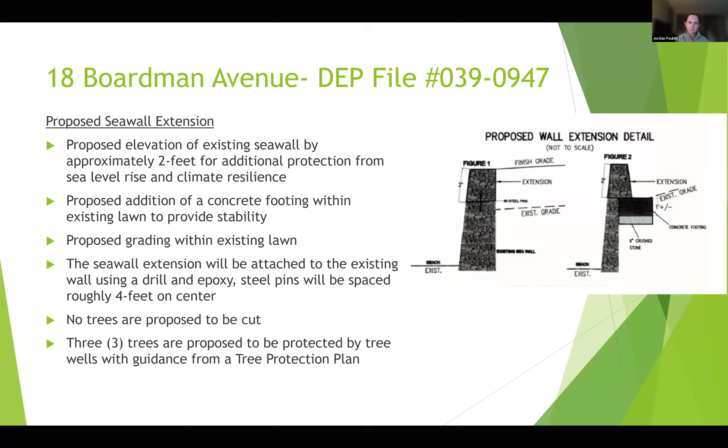The tree protection plan was drafted by certified arborist Chris Wood, who evaluated 3 trees—2 red oaks and a Norway maple. The plan includes adequately sized tree wells, maintaining appropriate root protection during construction, and limiting soil disturbance near the tree bases to help protect the trees.

The project will follow the tree protection plan during construction, and the proposed construction period is from April 1st to December 31st, with approximately a 6-week no-work period around August.

The proposed results of this project are 65 linear feet of impact to Coastal Bank, which is the majority of the existing seawall.

There's 1,225 square feet of disturbance within the 30-foot no-disturb zone, which is the grading adjacent to the seawall. Additionally, there's 300 square feet of disturbance within the 50-foot no-build zone, again from proposed grading, for a total of 1,525 square feet within the 100-foot buffer zone.

Within the land subject to coastal storm flowage, there's approximately 4,120 square feet of impact, because the entirety of this project is within the land subject to coastal storm flowage.

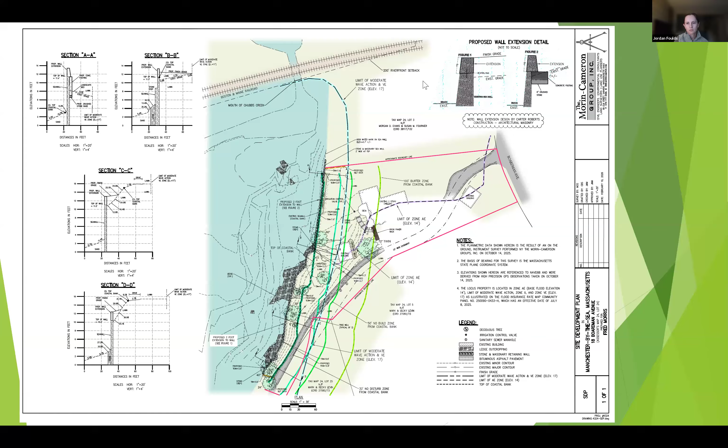How much fill is proposed, Jordan? Let me just check, one second.

So I know they're proposing to keep the grade adjacent to the wall the same. Because the wall is being raised 2 feet, they're proposing the grade adjacent, where the area is steep, be raised to the same level as the top of the wall.

All right, I think we just need to request that number. We do need to take a look at this.

I agree. Just to jump in here, there are two parts of this seawall. One half of it, the grade will be raised behind it, but it's already mounded, so fill-wise we're probably talking about 30 yards of crushed stone backfilling. The second half is a double-sided wall, so there won't be any grading on it — it'll just be raising the existing double-sided structure up 2 feet.

Okay, and is there any need to provide some compensating storage for storm flow? Because it's coastal, we don't have to compensate for storage.

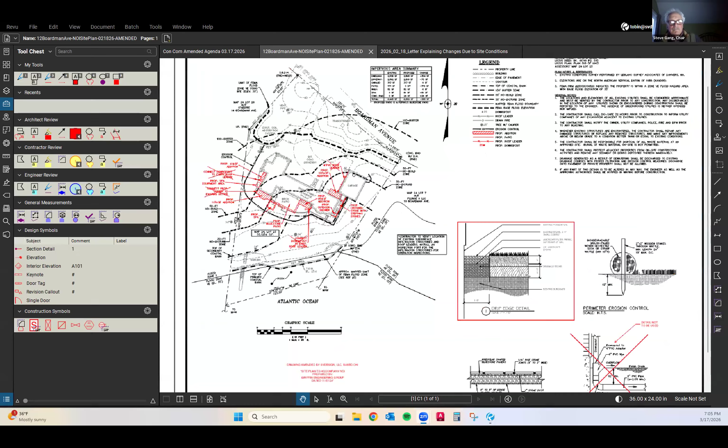Can everyone see my plan now? So it's a little bit funky because there's a secondary coastal bank. The primary coastal bank is the seawall, but there's a secondary coastal bank due to the topography, which was determined by Bob Griffin, which comes up relatively close to the house and runs along here. The areas where it would drip would be off the back of the garage, off the side of the house along this edge, and a little bit along the side edge here into what is already crushed stone there.

I was just wanting to confirm that there's a significant amount of lawn there for the dripping water to percolate. Yes, exactly - this is all lawn area between the patio and the seawall. Good, and I'm content with it as well.

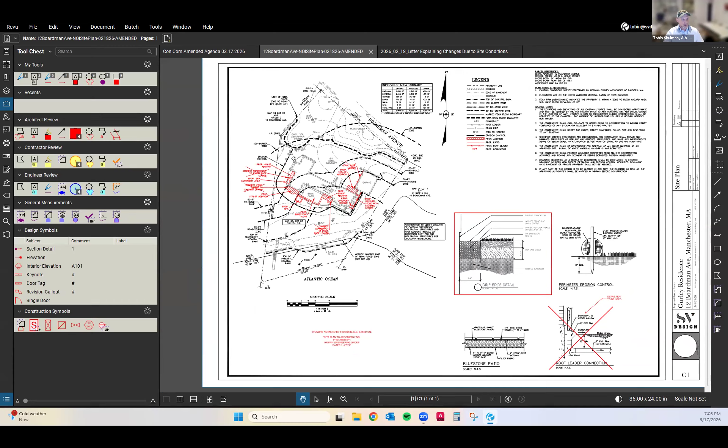Henry, Jim, David, any questions or concerns? Just a quick question, Tobin - do you anticipate addition of any more crushed stone to help with drainage? Yes, along the drip lines of the eaves, the proposal is to install about 18 inches of width of crushed stone, 6 inches of depth, to keep it from splashing back dirt on the house and give some area to absorb into, and then soak into the soil.

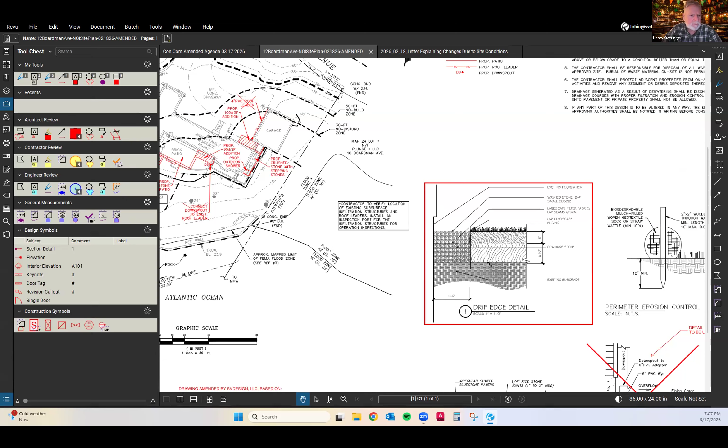Great, thank you. Could I just ask what kind of roof it is? It is an asphalt roof. Because we have expressed concern in the past just with matter leaching in off of an asphalt roof. I see.

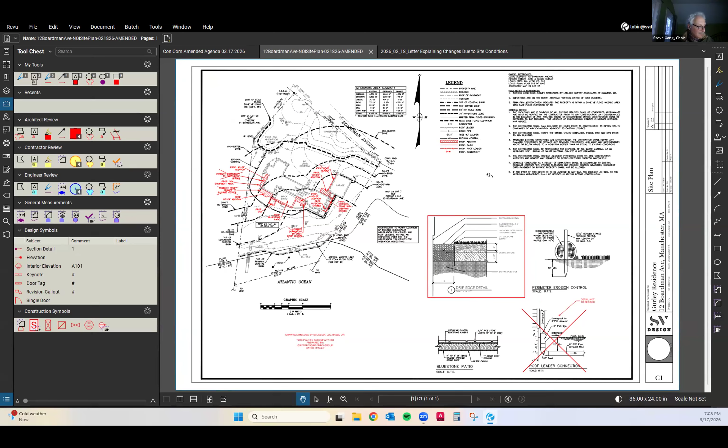There's a way to capture any particulates that come off of that. We do wrap the underside of this in a filter fabric so that anything that landed into that crushed stone would stay within that crushed stone - it wouldn't make it further beyond that filter fabric. Yeah, that's a good point. Good question.

Any comment from the public on 12 Boardman Avenue?

Commission ready to vote on this amendment? Yes. I'll hear a motion. I'll move that we issue an amendment to the order of condition of Mass DEP 039-0925 at 12 Boardman Ave. Seconded. All those in favor? Jim - aye. David - aye. Olga - aye. Henry - aye. And the chair is an aye as well.

Thank you, folks. Good luck with completing the project. Thank you very much, have a good evening. You too - happy St. Patrick's. You too.

Nobody's wearing green. I know. Well, Bethany's in the middle of a green wetland. I'm wearing green and a hat.

Next, we have a request for determination of applicability for 355 Summer Street from Stephen and Carolyn Kelly. We would have a local number for this, I assume, but I don't see it on the agenda. This is for invasive species removal within the 100-foot buffer zone and proposed native woody plantings.

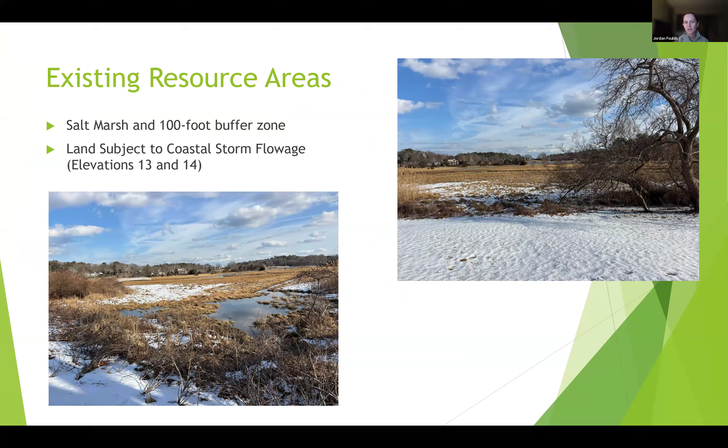The existing resource areas on this site are salt marsh and the 100-foot buffer zone of salt marsh, as well as land subject to coastal storm flowage at elevations 13 and 14. The project elements include native woody plantings, which would be installed in front of the existing solar panel - in this image, it's where the grasses are.

There would be a creation of a short berm, approximately 10 to 12 inches tall, with compost and sand mix, and the existing grasses would be temporarily excavated and then replanted into the berm. The goal of this native woody planting is to block some of the view of the solar panels from the street view and create more of a natural landscape. There is existing dead mugo pine, staghorn sumac, and multiflora rose on this side of the solar panels, and those are proposed to be removed and replaced with native species.

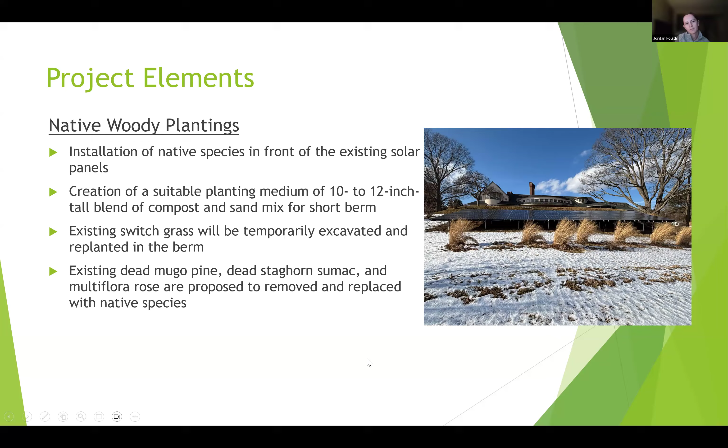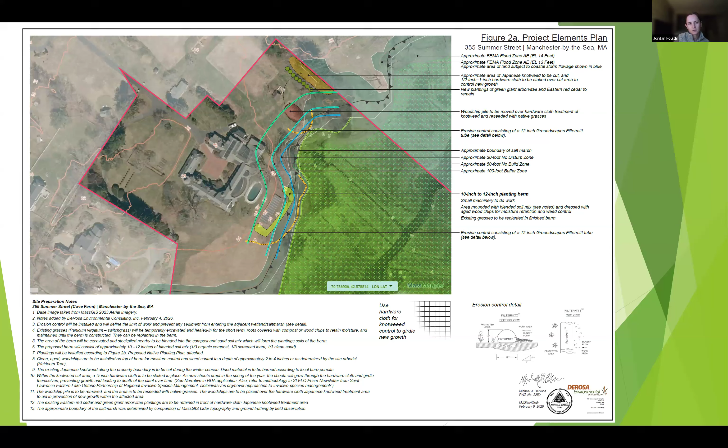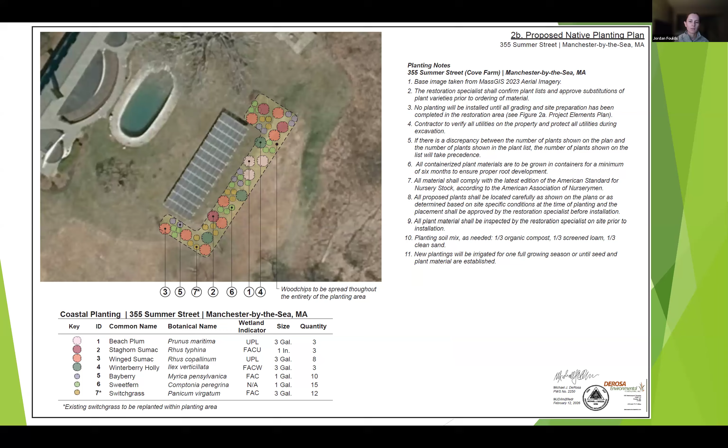And then I have the proposed native planting plan, which includes beach plum, staghorn sumac, winged sumac, winterberry holly, bayberry, sweet fern, and the existing switchgrasses to be removed and then planted back in the same location. And then I will take any questions.

Thank you, Jordan. Questions, comments from the commission? Henry? Yeah, thanks, Jordan. I'm comfortable with invasives removal and potentially with the moving of the wood pile. But creation of a berm inside of our buffer zone is something I'm not in favor of, very strongly not in favor of. And it leads me to ask a question actually about the solar panels.

Do you know who installed them, when they were installed, and if permission was received from Concom? Yes, it absolutely was. We were just checking. Jordan, on that, Olga? Yes, it was permitted. We've been working with the clients for a long time on projects within your jurisdiction, and it was permitted through conservation. Okay, got it.

So can I add a little bit of anecdote? Because I know the Kellys, the reason they're doing this is that the neighbors are complaining about the visuals of this solar array. They don't like the look of it, so they're trying to ameliorate that.